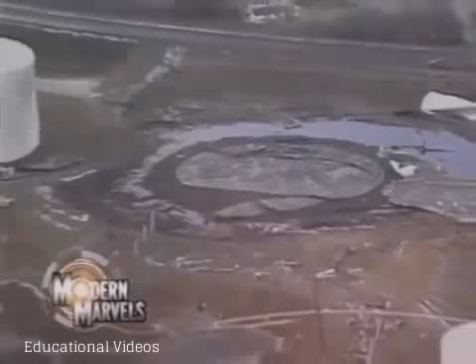Investigators search for the cause of two deadly Boeing 737 crashes. In 1959, a nuclear disaster near Los Angeles is hidden from the public. An oil tank collapse unleashes almost 4 million gallons of oil. And microscopic gremlins knock out everything from satellites to personal computers.

Now, engineering disasters on Modern Marvels.

On November 10th, 1975, the 29 crew members of the 729-foot ore carrier Edmund Fitzgerald were fighting an intense storm on Lake Superior. Their destination that day was the protected area of Whitefish Bay on Michigan's Upper Peninsula.

We're at Whitefish Point, just in front of the light station. Today the winds are only about 20 miles an hour. Can you imagine what it would have been like with 96-mile-an-hour winds? These waves are only about 4 or 5 feet today, but they were 35 feet back in 1975.

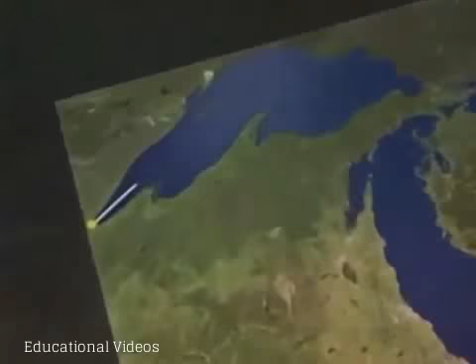When the storm had passed, the Edmund Fitzgerald was to deliver its iron ore to its final destination in Detroit's steel mills, where the ore would be used to make cars.

Despite the storm, the men were confident in their safety, because the Fitzgerald was one of the strongest and most capable ships on the lakes. This was a big, powerful boat, and people really wanted to be on the Edmund Fitzgerald. This was the one you aspired to serve on.

In fact, when it was launched in 1958, it was the premier ore carrier on the Great Lakes, setting records for the largest loads carried and the fastest trips.

The captain, Ernest McSorley, was also one of the most experienced in the business, with 44 years of sailing on the Great Lakes. But on November 10th, 1975, McSorley was virtually blinded by two critical navigation system failures.

He reported to a nearby ship that both of his radar units weren't working, and the radio direction finder was useless because of an outage at a station on shore.

That nearby ship, a few miles behind, was the Arthur Anderson, a slightly larger carrier also trying to reach Whitefish Bay. Captain Bernie Cooper, using the Anderson's radar, was radioing general compass headings to the Fitzgerald's crew.

The pilot house of a ship nearly identical to the Fitzgerald, the William Clay Ford, at the Dossin Great Lakes Museum in Detroit, gives a sense of what the captain and crew of the Fitzgerald were dealing with on November 10th.

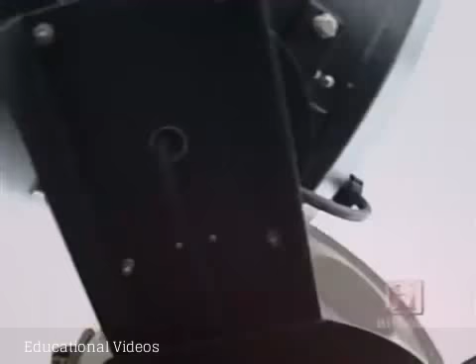The other option they had was to use the radio direction finder. With this, they could triangulate their course. However, the Whitefish Point sending station was out of service. On shore, the radio direction beacon at the Whitefish Point lighthouse didn't work. The storm had knocked out power, and the backup generator didn't kick in as it was supposed to.

These failures may have doomed the Edmund Fitzgerald.

At about 3:30 in the afternoon, McSorley reported to Cooper that one of the fence rails, part of the sturdy safety fences on each side of the Fitzgerald, had snapped. He also said two vent covers were missing, and the ship was listing to the side, evidence that water was entering the Fitzgerald.

These were all signs of severe damage, but the ship soldiered on, pumping out water as it went.

Then at 7:10 p.m., the first mate aboard the Arthur Anderson asked McSorley how the men of the Fitzgerald were doing. The response back from Fitzgerald to the Arthur Anderson was, "We are holding our own." That was the last communication between the two ships. Minutes later, the Edmund Fitzgerald disappeared from the radar screen aboard the Arthur Anderson, without as much as a distress signal.

After a difficult and limited search during the storm, and a larger search the next day, it was clear the unthinkable had happened. It looks from the information that we have that it's fairly certain that the Fitzgerald went down, and we're talking now about a matter of life and death and looking for survivors.

Those first images of the wreck, and footage from many other dives over the years, showed that the ship lay in two pieces on the bottom of Lake Superior, with its back, or stern, resting upside down.

The ore pellets from the cargo hold were strewn about, and the middle 200 feet of the ship had disintegrated into small pieces. But finding the wreck didn't provide answers to the questions about what caused the Fitzgerald to sink, and why the crew never called for help.

More than 3 decades later, strong opinions still surround the theories of the ship's tragic fate. A Coast Guard investigative board looked into many possibilities. Probably the only one they could confidently rule out once the wreck was discovered was that the Fitzgerald had broken in half on the surface. The ship didn't break in half because the bow would have floated for a while longer and the stern would have floated for a while, and they both would have disappeared a little bit further apart. Instead, the two pieces of the ship lay only a few hundred feet apart.

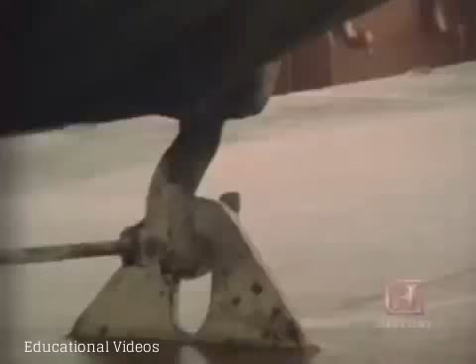In terms of official findings, the Coast Guard report issued on July 26, 1977, concluded that water crashing on the deck and leaking through cracked and poorly sealed hatch covers was the most likely cause of the disaster. The seals on freighter hatch covers were often damaged during loading and unloading, and crews often skimped on the tedious process of tightening most of the hatch cover clamps.

Still, many people disagreed with the Coast Guard's theory. If water was leaking in through the hatch covers, then the pumps that were on - these 7,000 gallon per minute pumps, and there were 2 of them going - should have been able to keep up with as much water as these hatch covers would allow through leaking.

The Lake Carriers Association, which represented 15 shipping companies, protested to the National Transportation Safety Board, which issued its own findings on May 4, 1978. The NTSB also focused on the cargo hatches, but in a different way. It felt the tremendous weight of water crashing across the Fitzgerald's main deck, known as the spar deck, forced one or more of the hatches to implode and swiftly flood the cargo hold.

You can tell by the size of these things, the 729-foot freighter, these things weigh tons, and it would take an awful lot of weight to cause them to implode.

Finally, the Lake Carriers Association proposed its own theory: that the Fitzgerald struck bottom in the shallow waters around Caribou Island, a plausible consequence of the ship's navigation system failures. Hitting bottom could have caused a rupture in the hull below the waterline. The downed fence rail and missing vents that McSorley reported near Caribou Island seemed to bolster that scenario.

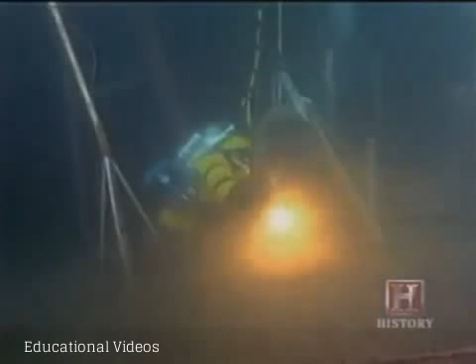When this bell broke the surface after 20 years of darkness and silence, it actually swung and tolled, and everybody around for about a mile could hear it. It was one of the most eerie experiences I've ever had, and the tone itself has such a resonating quality to it that is something you'll never forget.

After the original bell was recovered from the wreckage of the Edmund Fitzgerald, a replica bell was put in its place. The names of all 29 crew members were inscribed on the replica, which serves as a permanent grave marker.

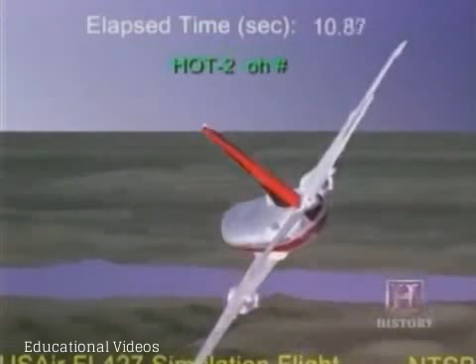Then, in 1994, an eerily similar second 737 crash occurred. This time, USAir Flight 427 approached Pittsburgh on a calm September evening. It passed through some turbulence from the wake of a plane a few miles ahead, which momentarily surprised the crew. It should have been easy for the experienced pilot to make a simple adjustment. But the 737 suddenly banked hard to the left, turned over, and spiraled into the ground.

All 132 people on board died. Investigators rushed to the scene, immediately aware of the similarities to the 1991 Colorado Springs crash.

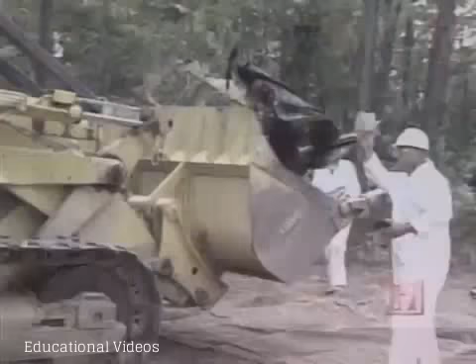This time, they had more information to work with. We had more flight data recorder parameters. And also, with USAir 427, the rudder power control unit that controls the rudder was intact. It was in a testable condition, which we didn't have before.

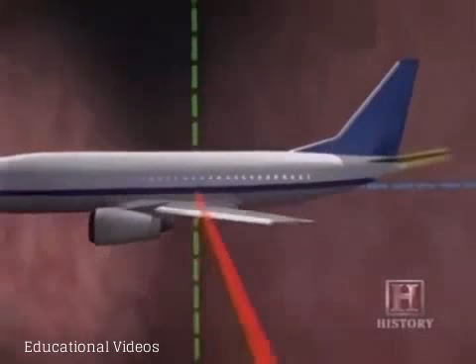The rudder of an airplane functions much like the rudder of a ship, turning the aircraft to its right or left, which is known as yaw. Flaps on the wings, known as ailerons, control the roll of the plane to the left or right. Adjusting the horizontal stabilizer on the tail affects the pitch, which raises or lowers the nose of the plane.

But extreme rudder movements can affect more than just the yaw of an aircraft. What happens when the rudder reaches its full travel limit is that the airplane slips through the air sideways. And as a result, for airplanes that have swept-back wings, one wing develops more lift than the other, and the airplane then starts to roll.

At relatively low speeds, such as during takeoff, or in the case of both crashes, on approach to landing, if the extreme rudder position is not corrected, the rudder will overpower any aileron adjustments and force the aircraft all the way over, leading to a nosedive into the ground.

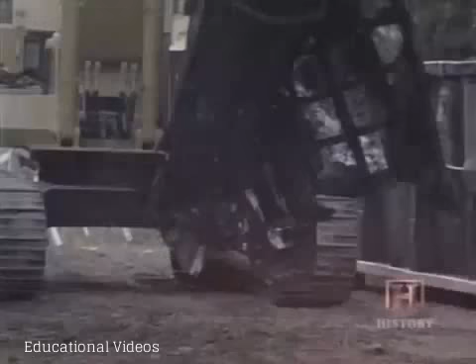Initial tests of the USAir rudder equipment didn't reveal any defects. Because the crash happened on a clear evening with little wind, adverse weather could be ruled out. The only other possibility seemed to be pilot error or disorientation.

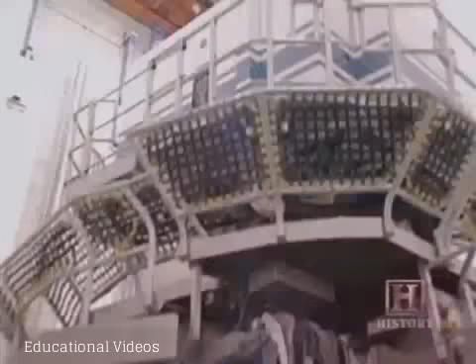To test the motion effects recorded from the USAir flight in 1994, investigators went to the NASA Ames Research Center in Northern California, home of the world's largest flight simulator.

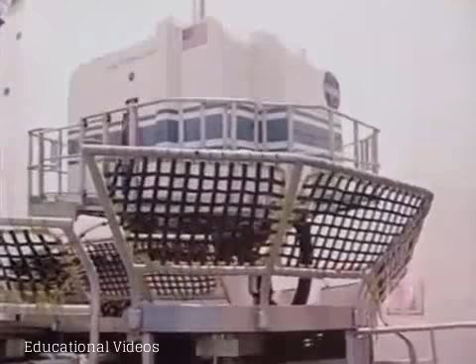Unlike other simulators that simply pivot on a stationary platform, the center's vertical motion simulator can move 60 feet up or down and 40 feet side to side. Pilots from all over the world who have come to fly it say it replicates flight like no other simulator they've ever been in.

Technicians loaded information directly from USAir 427's flight data recorder into the simulator's computers. Computers ready. Operate. The result, seen here using the same flight information, was a chilling reconstruction of what the crew most likely saw and felt.

As we roll out, there'll be a wake vortex upset that resulted from a 727 flying ahead of the 737, and that started the maneuver. Right there you feel the wake vortex upset. The pilot then tries to right the airplane, but during that process the rudder goes over hard to the left, and as a result the airplane rolls uncontrollably to the left. It must have been terrifying in the cockpit.

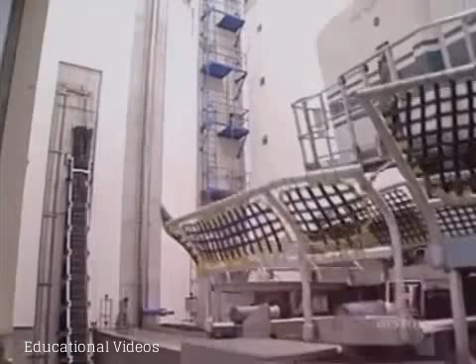Nothing from the work in the vertical motion simulator led investigators and motion experts to believe that pilot error or disorientation were factors in the crash.

They returned to the rudder control system, but could still find no sign of malfunction. Then, a vital clue: in June 1996, an Eastwind Airlines pilot reported rudder problems.

It seemed like the hydraulic system of his 737 was actually pushing back when he depressed the foot pedal that controlled the plane's rudder. Luckily, the plane didn't crash because the incident didn't occur during takeoff or landing.

This incident led NTSB investigators to examine how the rudder could have moved opposite of the pilot's control. They focused on the hydraulic heart of the system, the rudder's dual servo valve power control unit.

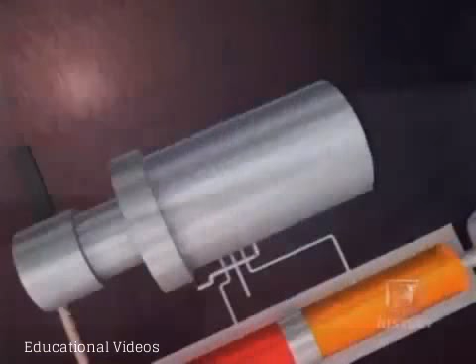It's about the size of a soda can, and inside is a valve about the size of a pencil with ridges in it that moves back and forth and ports fluid. That's the primary valve. Around that is a slightly larger cylindrical valve with ports in it, called the secondary valve. When a rudder is operating normally, only the inner primary valve is supposed to move.

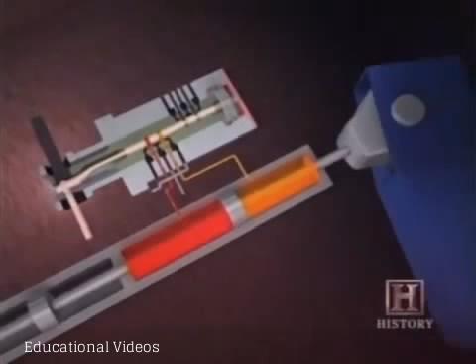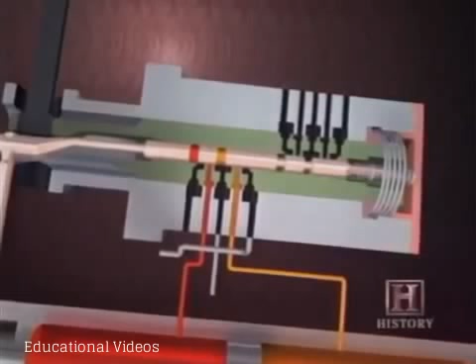Depending on which direction a pilot wants to turn, the hydraulic pressure either extends or retracts a piston, which then turns the rudder. Once the pilot's foot is off the pedal, the pressure is released and the rudder returns to a neutral position. The outer secondary valve only moves if the smaller primary valve becomes stuck.

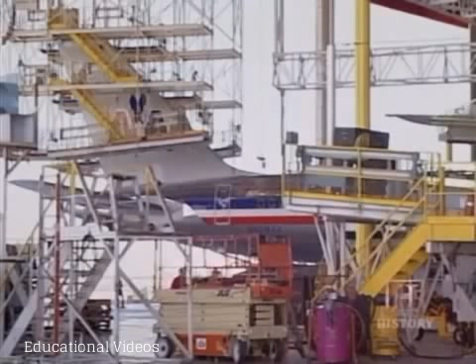Virtually all aircraft systems have both a primary and a backup, an important design feature known as redundancy in the airline business. But since the 737's rudder power control unit used two valves within the same hydraulic system, the valves were not totally independent of each other.

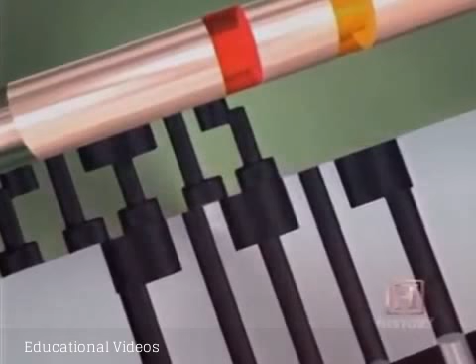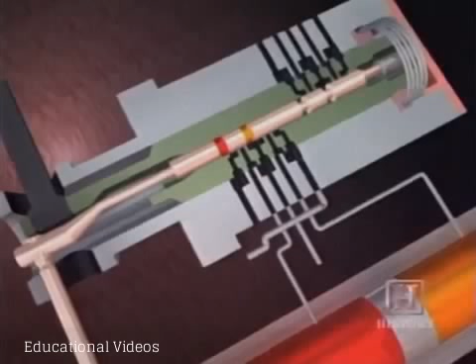In 1998, investigators discovered how the valves had created the deadly problem. They saw that if the secondary valve were jammed just slightly off neutral, and a high rate command was put into the primary valve, you could misport the hydraulic fluid and cause the rudder to reverse operation.

This would be very similar to driving your car. You turn to the right, the car goes left. You probably will keep trying to turn to the right. You won't figure that out before you go off the road.

The longest NTSB aircraft investigation in history was finally over, 4.5 years after the US Air 737 crash in Pittsburgh.

Instructors immediately taught 737 pilots ways to correct the problem, such as momentarily removing a foot from the pedal to release pressure in the event of a jam, and switching from the primary to the secondary hydraulic master control for the entire aircraft in order to free the rudder.

The training continues today because the new units with two completely separate rudder control systems are still being installed. In fact, the retrofit process won't be complete until near the end of the decade. However, the planes are still safe in the meantime, thanks to extensive pilot training. And the 737 seems destined to remain the workhorse of the industry as the design changes are completed.

Since the 737 debuted in 1968, Boeing has built over 5,000 of the planes. That makes the 737 history's best-selling passenger airplane.

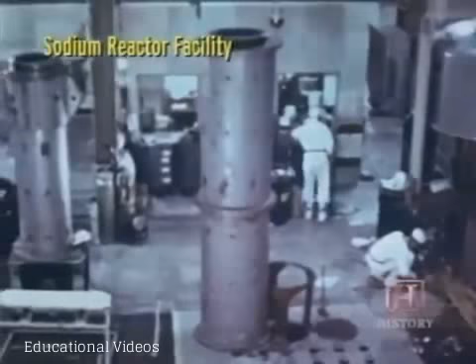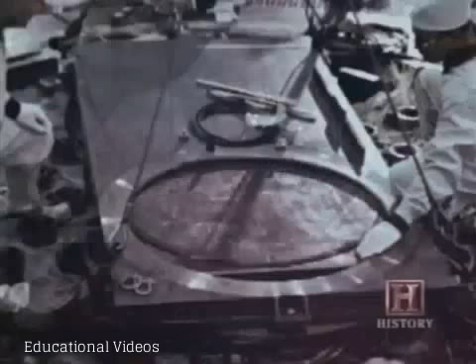Besides rockets, it was home to several experimental nuclear reactors, which the Atomic Energy Commission hoped could be commercially viable. One of them used sodium instead of water as a coolant. It was known as the Sodium Reactor Experiment, or SRE. But the experiment would soon trigger a technological nightmare.

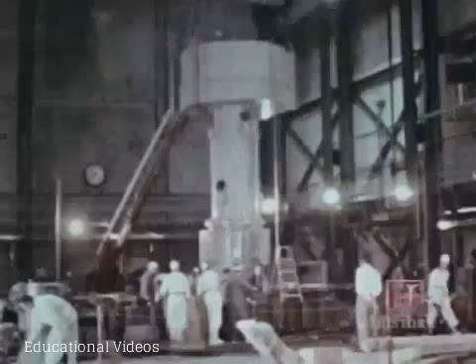This reactor was built in an era of nuclear cowboys. The Atomic Energy Commission came out of the Manhattan Project. There was a culture of secrecy, and a sense of excitement about pushing the limit on these reactors.

On July 13, 1959, technicians barely managed to manually shut down the sodium reactor when temperature and radiation readings quickly jumped. Then, after 2 hours of basic inspections, they made a baffling decision. They started up the reactor anyway.

When they dropped a camera into the reactor core, they discovered that 13 of 43 radioactive fuel rods were damaged and partially melted. Because this was an experimental reactor, a thick concrete containment structure, such a familiar and vital part of more modern reactors, wasn't required. It's just built in an ordinary industrial building.

In fact, it was designed so that radioactive gases would be intentionally vented from the reactor to holding tanks and then out into the environment. Exactly how much radiation went into the atmosphere is still a matter of debate, because the monitoring equipment at the facility could only measure very minor levels of radiation.

This was a much smaller reactor than the one at the site of the famous 3 Mile Island accident in Harrisburg, Pennsylvania in 1979. But because it didn't have a containment dome, the sodium reactor might have created a much bigger problem. The SRE was about 1/100th the size of 3 Mile Island.

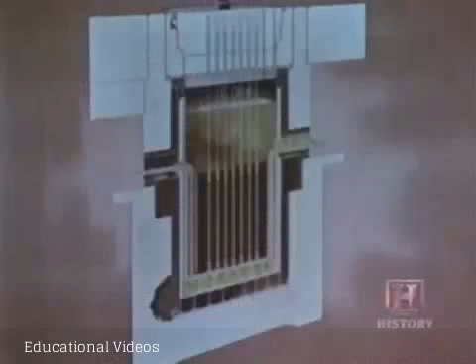In 1961, the Atomic Energy Commission made a film which documents the extent of the damage and cleanup process. It also explained exactly what went wrong inside this unique reactor, where molten or liquid sodium was used instead of water to remove heat from the swimming pool-sized reactor area.

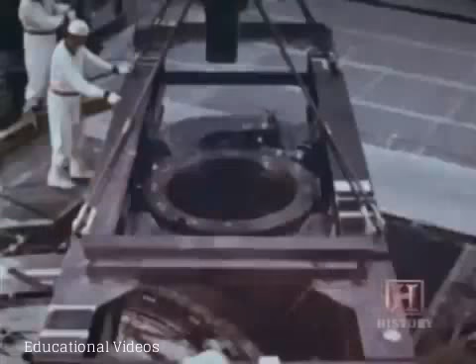Sodium reactors were being developed because there was a concern there wasn't enough uranium to fuel all of the nuclear reactors being built at the time. Sodium reactors never deplete their original fuel supply. Water reactors are less efficient, since they consume uranium and eventually need to be resupplied.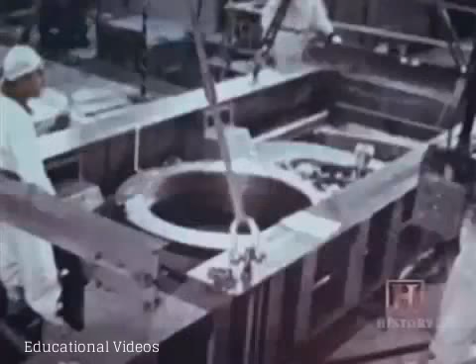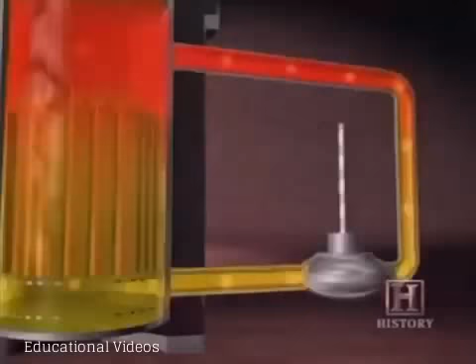But the benefits of liquid sodium came with a price. Sodium burns in the presence of air, and explodes in the presence of water, so the reactors had tremendous danger associated with them. Because water couldn't be near the reactor, a chemical known as tetralin was used to cool the bearings in the pumps that circulated the sodium as it carried heat away from the fuel rods.

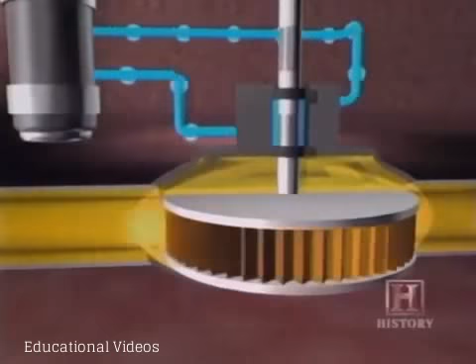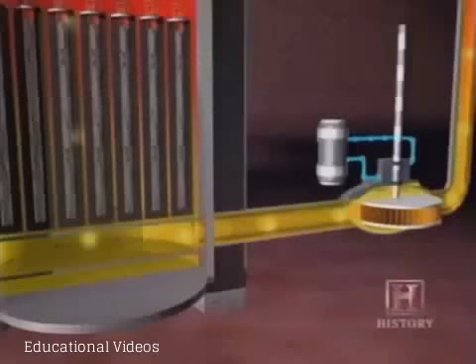Everything worked well until tetralin started leaking through cracks in the pump seals and into the reactor. The neutron bombardment inside the reactor core caused it to turn from an organic chemical into an almost glue or tar-like substance. As the tetralin approached the fuel rods, it partially blocked the bottom of some of the coolant channels. When coolant flow decreased, the heat by those fuel rods increased and eventually reached melting point.

What happens when the fuel starts melting is the radioactive byproducts, which have been created from reactor operation, have to go somewhere. So those radioactive byproducts go into the molten sodium, and some of those byproducts come out as a vapor, and in this case, went into the air.

Some of the radioactive materials, like strontium, are actually absorbed by the body into the bones and teeth, so they remain in the body for a long period of time, all the while releasing radioactivity that can harm cells and other parts of the body.

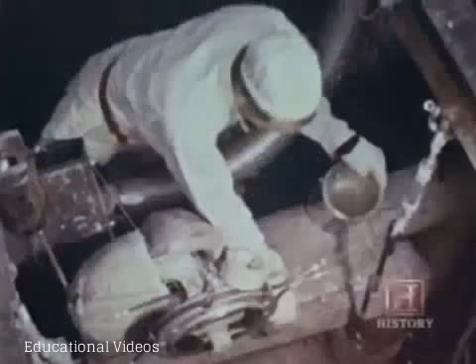Workers who cleaned up after the accident or worked at the facility once it was restarted were at highest risk. Studies done of the workers by a team from the UCLA School of Public Health found that the workers who had the highest radiation exposures had tripled the death rates from cancers such as cancer of the lung, lymph, and blood systems, compared to similar workers at the site who had lower radiation exposures.

The University of California at Los Angeles was also responsible for bringing the story to the public. After the 3 Mile Island accident in 1979, some of Daniel Hirsch's students started wondering if anything like it had ever happened in Southern California.

In UCLA's engineering library, they found documents and photographs of the melted fuel rods from the sodium reactor accident at the site run by Rocketdyne's Atomics International division. By a quirk of fate, it turned out that the man who had founded and run Atomics International had subsequently become Dean of Engineering at UCLA and taken with him box loads of the old documents.

We then released that to the press in 1979. So the AEC kept it secret, and it stayed secret for 20 years. The Atomic Energy Commission also managed to conceal accidents at 2 other reactors at the Santa Susana facility in the 1960s.

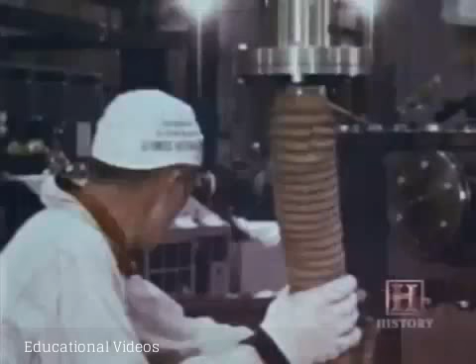And Southern California's population continues to swell. People are living closer than ever to the site, which is now owned by Boeing. And because certain types of radiation released in the accident can remain at dangerously high levels for centuries, the decisions made at Santa Susana in the 1950s and 60s will continue to affect residents for generations to come.

Of the 3 most prevalent radioactive elements identified at the Santa Susana site, cesium-137 has the longest half-life at 30 years. Dangerous amounts of it will remain there for about 300 years.

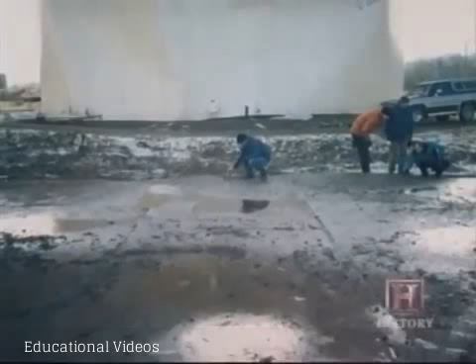Contractors hired by Ashland used booms and other equipment to collect as much oil as possible from the river's surface. By the time John Gross and other investigators arrived, the oil in the dike areas had been pumped out to barges. It was very obvious from just standing on one of the dikes, with a full view of the tank, to see that it had split vertically and had begun to unpeel, like you would unpeel an orange.

When the steel split, it left behind arrow-like markings, similar to the chevron stripes on a military uniform. We found the chevron markings along this area to be pointing down, and the chevron markings along this area to be pointing up. So just about at eye level was the confluence of those two, and this is where the fracture initiated.

At that spot was a dark area about 3/4 of an inch long. This is where it had all started. This is a close-up of the defect in the tank wall. You can see it's this dark area here.

That dark color is caused by carburization, which is a result of the combination of carbon and oxygen, present in the cutting operations that were used in either putting the tank together the first time or in reassembling.

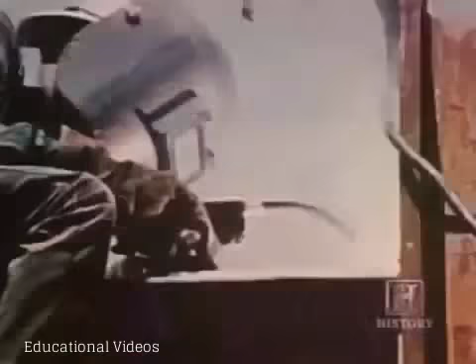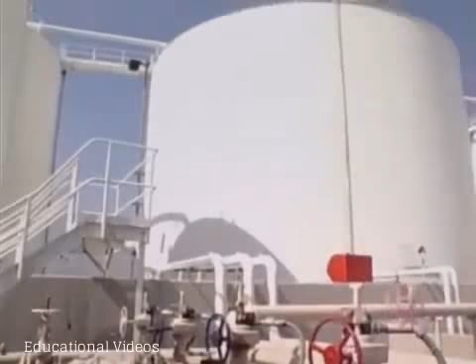Even today, small defects like this aren't uncommon in these huge tanks. It's hard to prevent such imperfections during large cutting and welding operations. But ordinarily, weak spots in modern tanks lead only to small leaks, which can then be easily repaired and cleaned up.

Because of the speed of the collapse, the clean split, and the telltale chevron markings, investigators quickly identified brittle fracture, often a problem with weaker forms of steel dating from the 1940s and earlier, as the cause of the catastrophic failure in Floreffe. Brittle fracture has been known to plague a variety of older structures, even large ships.

Tests revealed it was the main reason for the failure of this tank, which had been built in the early 1940s. And the weather compounded the problem. Sub-zero temperatures before and during the filling made the tank's old steel even more brittle.

The exact location of the defect was also a factor. Welds are always weaker than the solid inner portions of a plate.

When workers disassembled the tank in Cleveland, new cuts were made away from the original welds, since rewelding the same area can actually make it weaker.

But when the tank was put back together in Pennsylvania, the defect happened to be in an especially dangerous spot. The fracture occurred in this general location. This is also the location where a horizontal weld and a vertical weld come together. We call it a T-joint, and it's in this area that has particularly high stress concentrations.

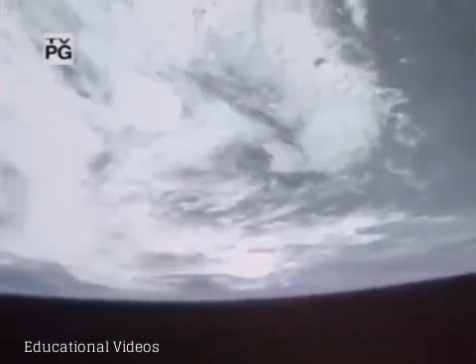On May 19, 1998, at 6 p.m. Eastern Time, the Galaxy 4 communications satellite high above the American Midwest suddenly rotated out of position on its own. This small movement created a disastrous ripple effect below.

Most of the 40 million pagers in service in the United States suddenly went silent for the first time in the 35-year history of the industry. Thousands of ATMs and credit card authorization services also failed, and several television and radio networks were unable to distribute programs to affiliates.

There were thousands of antennas on the ground, all expecting to send signals and receive signals back to the Galaxy 4. If it's pointed the wrong direction, it can't hear what the ground is trying to tell it, nor can it send signals back to the ground.

More than 80% of the nation's paging companies depended solely on the Galaxy 4. It took 3 chaotic days for technicians at PanAmSat, the operator of the Galaxy 4, to reroute the millions of pagers to other satellites and restore customer service.

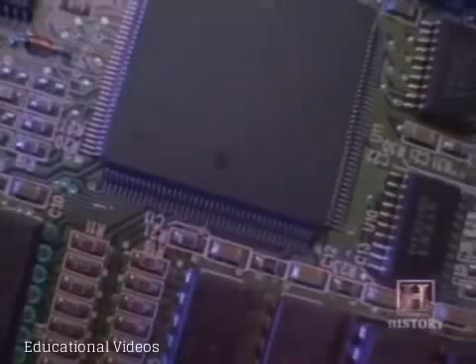Since the satellite is still in outer space, it's impossible to inspect. But the widely accepted cause of this enormous problem is something incredibly small: a short circuit within the positioning system, created by a microscopic phenomenon known as a tin whisker.

The small metal leads on microchips electronically connect the chips to other components on a circuit board, allowing for the exchange of information across the system. These leads are coated with a conductive metal to prevent corrosion. Tin is the preferred coating material because it's widely available and inexpensive.

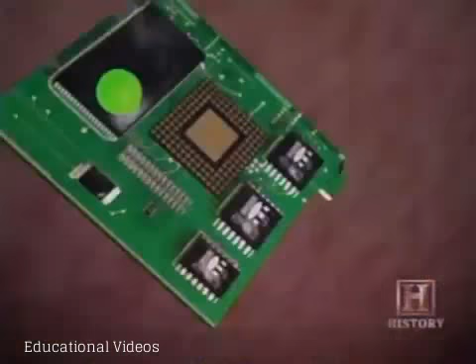Tin whiskers are crystalline structures that grow spontaneously from this coating and can short-circuit microchip components by suddenly connecting leads that aren't supposed to be connected.

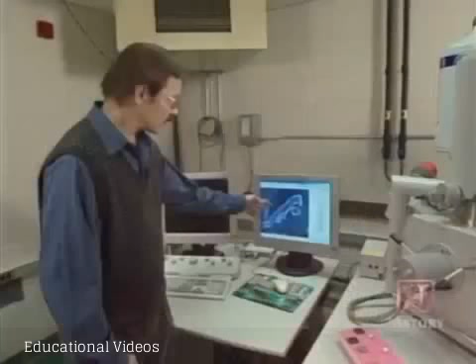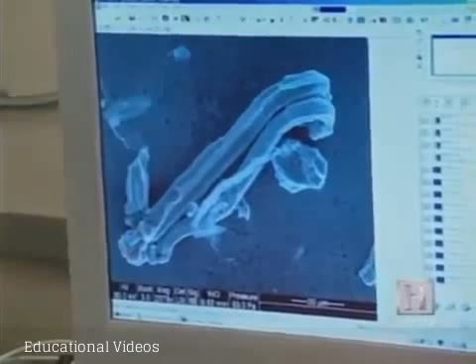Usually these leads are only 75 microns apart, meaning electron microscopes are needed to get a good look at the whiskers. This is a picture of 2 whiskers and maybe a 3rd whisker on the side here. To give you a sense of the dimensions, these 2 whiskers are maybe a quarter or at least less than half the diameter of a human hair. And the lengths are about 100 microns, and this length dimension would cross between 2 leads of this kind of component here.

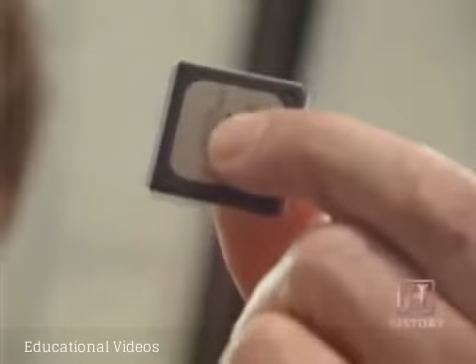The tin whisker that caused the Galaxy 4 to fail grew from the best intentions. Researchers identified whisker growth on tin and other metals as early as the 1940s.

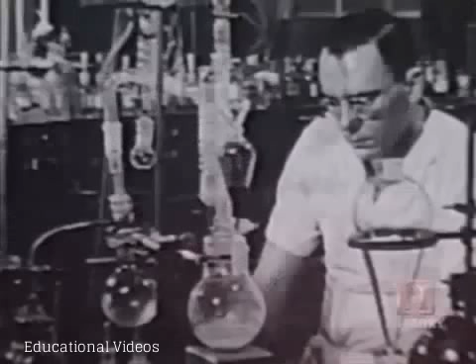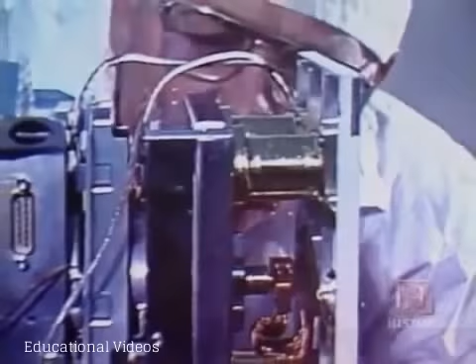During the 1950s, experiments revealed that adding lead to tin created an alloy that greatly reduced whisker growth. But environmental concerns about lead caused many electronics manufacturers to switch back to pure tin, beginning in the 1980s.

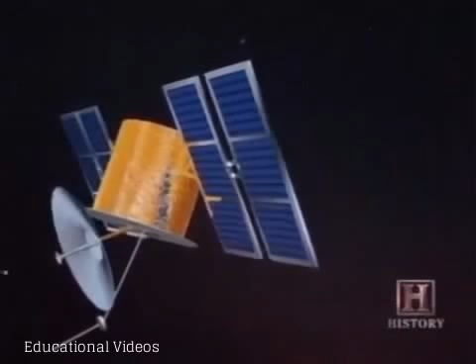Tin whiskers have been blamed for the complete loss of 3 satellites and have partially damaged at least 4 others. But satellites aren't the only type of expensive and critical equipment that these tiny gremlins strike. They've shown up in F-15 fighter aircraft radar, air-to-air missiles, and heart pacemakers.

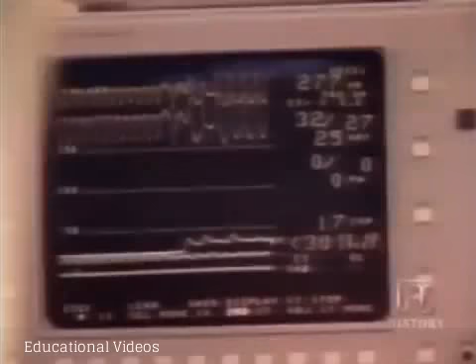In the nuclear power industry, the tin whisker problem showed up in the unplanned shutdown of the Millstone 3 plant in April 2005 in Connecticut. That problem was due to a tin whisker crossing over between circuits in a logic board.

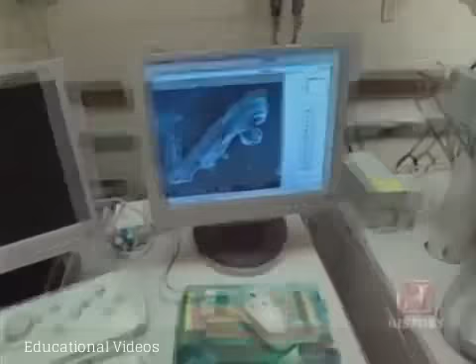Inside the University of Maryland's engineering department, long-term experiments are conducted over several years by subjecting closely spaced plates of tin and other metals to various temperature, humidity, and other conditions. From these experiments, researchers can determine if certain conditions inhibit or promote whisker growth.

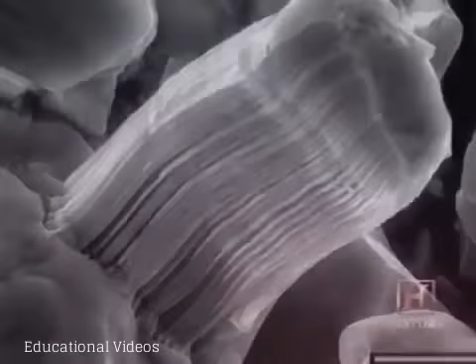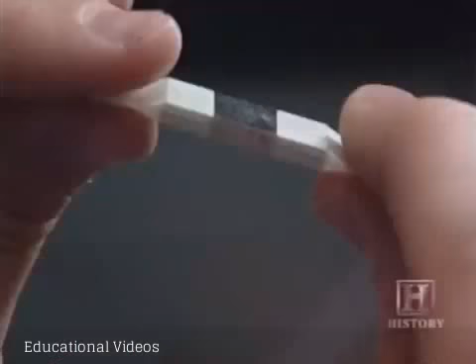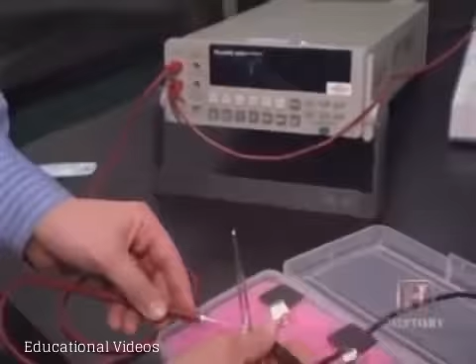These plates are being subjected to 50% humidity at 50 degrees Celsius. Pulling one out, if you look, basically we have a span of about 75 microns spacing between these 2 plates. Using this resistance measurement, if we have an open circuit, basically we'll record nothing. If we touch these 2 surfaces, if there is a whisker, we'll see a response, and as you can see, a response is indicated, which means there is a whisker bridging these 2 surfaces.

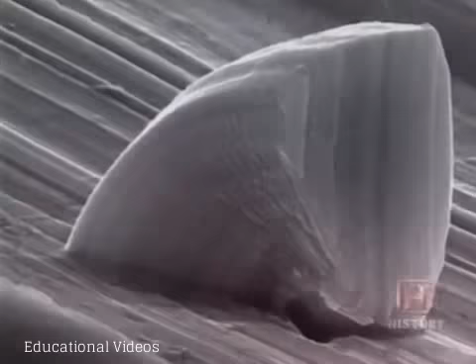But scientists still don't understand how to prevent these formations from occurring in the first place.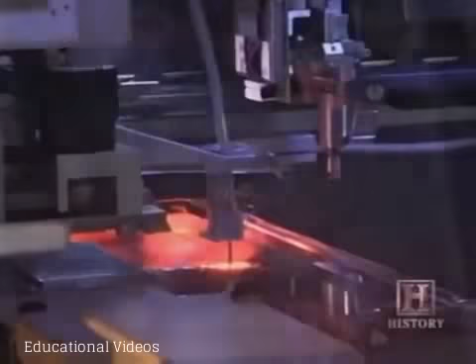Meanwhile, as electronics and microchips continue to get smaller and appear in more and more everyday products, the tin whiskers problem keeps getting bigger. Tin whiskers are a classic example of a very small thing causing a great deal of damage. They have caused hundreds of millions of dollars in damage and are capable of causing damage in the billions.

Until science can find a solution, it seems that all industry and consumers can do is wait for the next gremlin to strike.